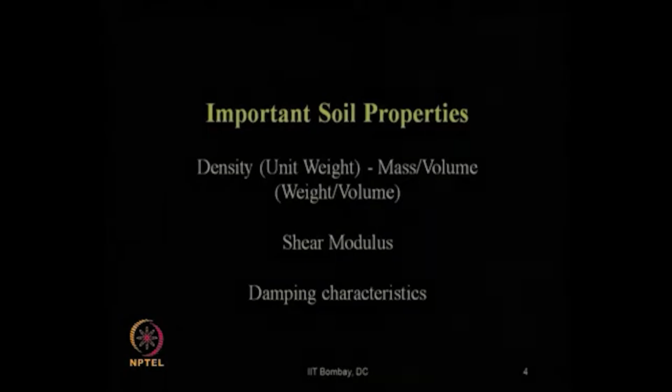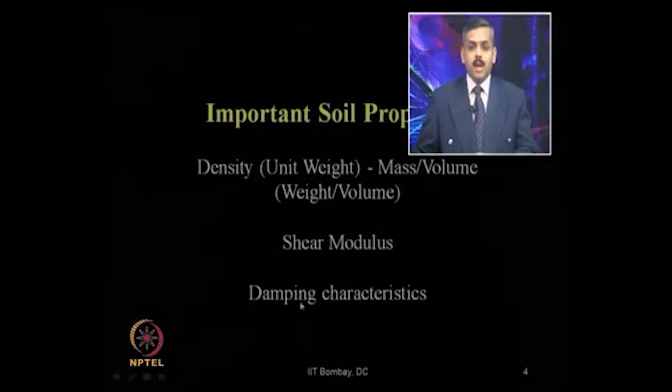In the previous lecture, we discussed the most important dynamic soil properties. We need to know first about the density or unit weight of the soil, then shear modulus, which is an important dynamic soil property, and damping characteristics, another important dynamic soil property.

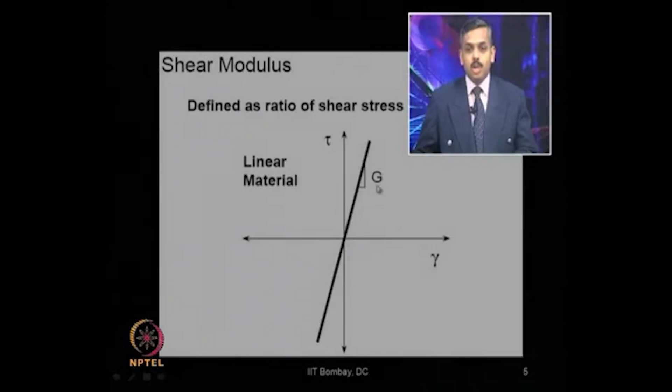For a linear material, one that behaves linearly, the tau versus gamma, or shear stress versus shear strain relationship, is something linear like this. Hence we get a single value of shear modulus from this curve.

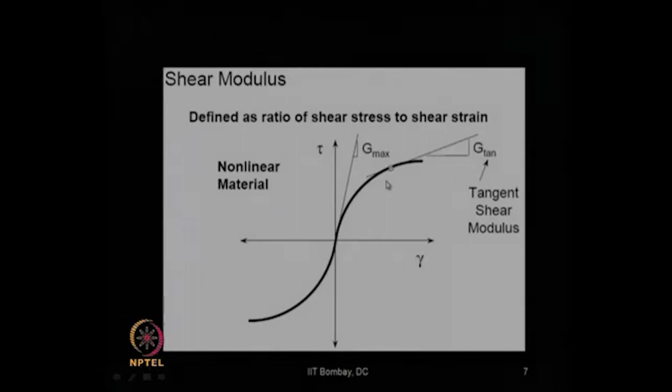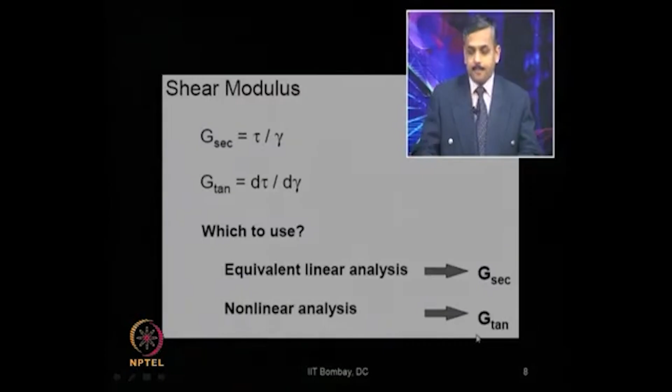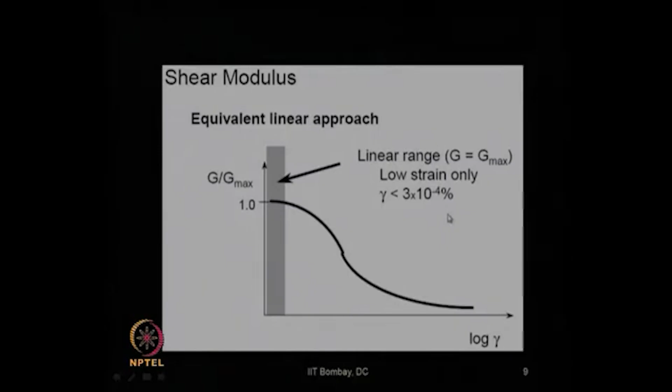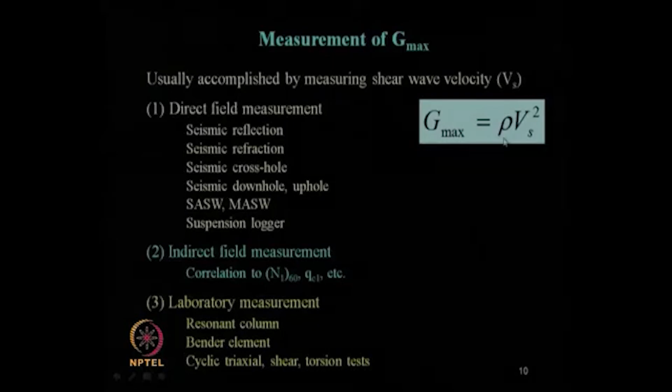Now, coming to various relationships of this G value with respect to SPT N value, that is the standard penetration test N value, several researchers have obtained correlations between the corrected SPT N value, N1 60, with respect to Gmax.

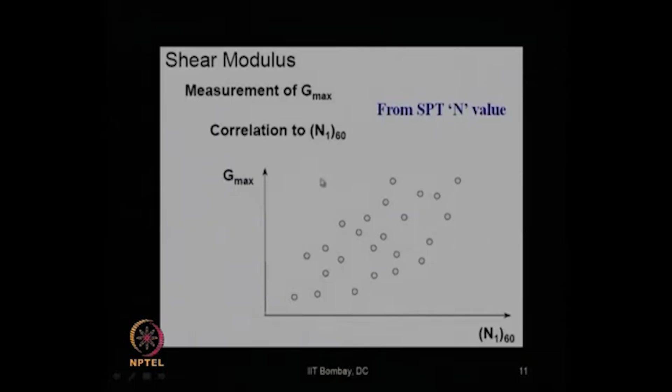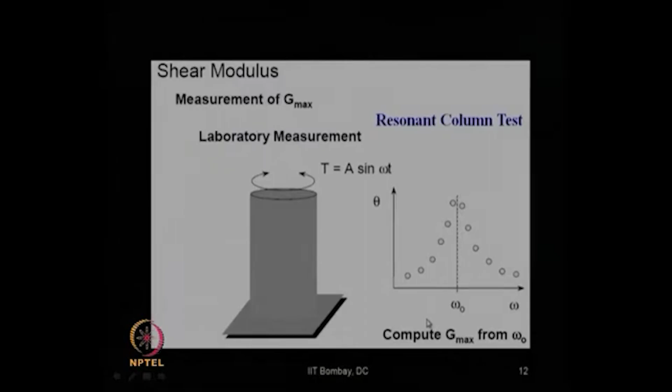Also in the laboratory, one can find out using the resonant column test the value of Gmax at the resonant frequency, from the plot of distortion at different frequencies on the resonant column under applied torque. Also, from the cyclic triaxial test, one can find out the Gmax value.

Another way to obtain the Gmax value is from in situ test parameters using various empirical relationships available worldwide, like SPT N value, CPT cone penetration value, DMT dilatometer test value, and PMT pressure meter test value. From each of these tests we get empirical relationships for different types of soil, as proposed by various researchers worldwide. But we need to remember these relationships are developed for a limited number of data points and for a typical soil of that region.

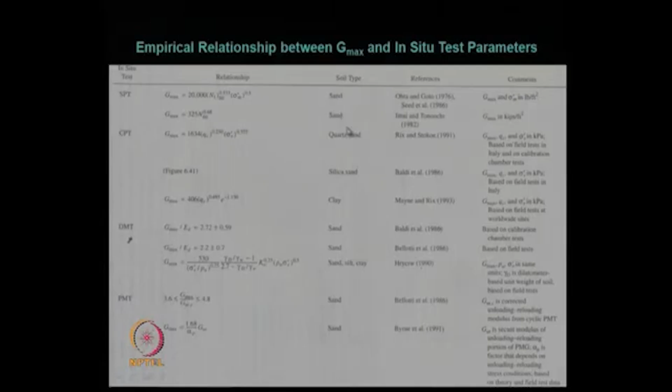So the acceptability of these empirical relationships always needs to be checked when somebody is trying to do a rigorous analysis for obtaining the Gmax value and further using that Gmax for dynamic analysis.

The variation of G by Gmax with respect to cyclic shear strain for different values of plasticity index was reported by Vucetic and Dobry in 1991, showing this type of variation, and also with respect to the number of cycles, that is, if number of cycles increases, there will be a change in the Gmax value. Obviously it is going to decrease, as can be seen from here.

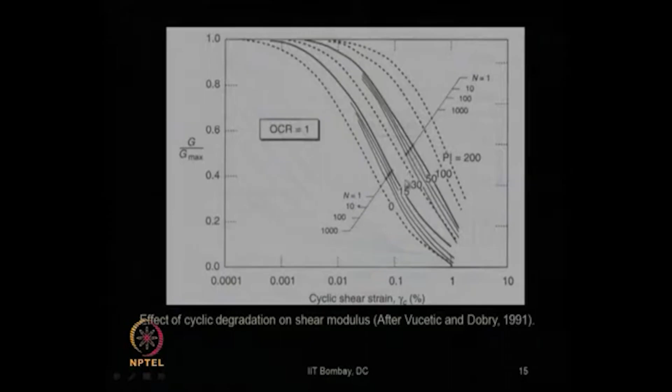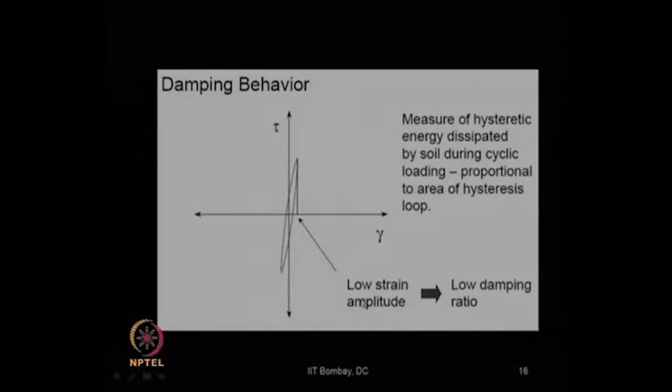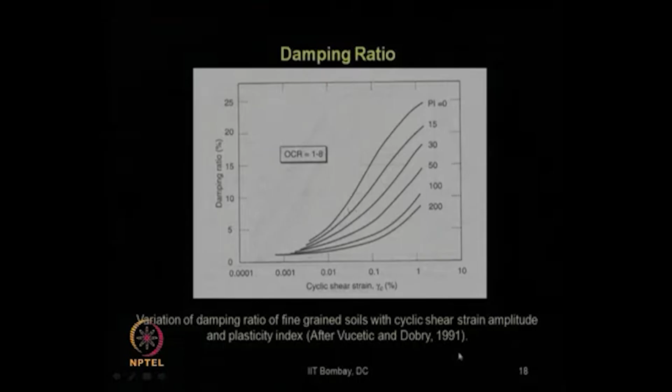The other important parameter is damping behavior, which we discussed in our previous lecture: at low strain we expect low damping ratio, whereas at high strain we get a high damping ratio value. The variation of damping ratio with respect to cyclic shear strain for a typical soil material will look like this. This result is also given by Vucetic and Dobry in 1991 for different values of plasticity index for fine grained soils.

Now, worldwide there are developments on the SPT N value versus shear wave velocity relationship, because many times people cannot obtain the dynamic shear wave velocity at the soil site or field. So instead, people can reasonably use the static test, the standard penetration test SPT N value, to get the value of Vs, which can further be used to compute the Gmax value for dynamic design.

How is it done? The example we discussed in our previous lecture was for soil of the Bangalore region in India. Sitharam et al. in 2006 proposed an empirical relationship for Vs in terms of the corrected SPT N160 value, also corrected with respect to clean sand, N160CS, to obtain the Vs value in the absence of actual field test data. Also for other types of residual soil, silty sand and sandy silt, upper bound and lower bound equations were proposed by these researchers.

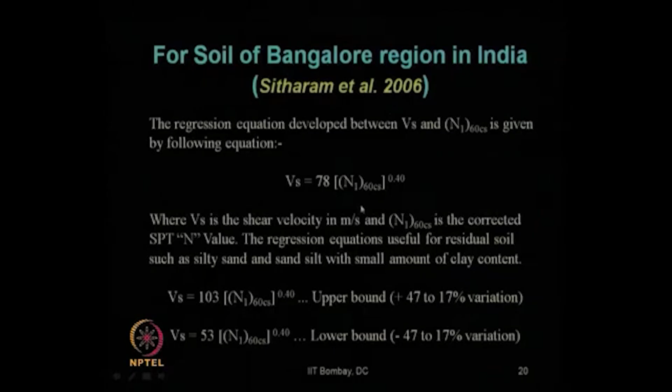Another group of researchers proposed relationships for soil of the Chennai region in India. Boominathan et al. in 2006 developed, for clay soil and for sandy soil, the relationship between Vs and the corrected SPT N value.

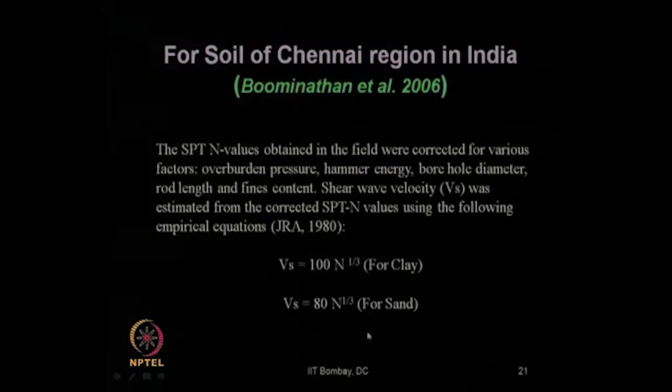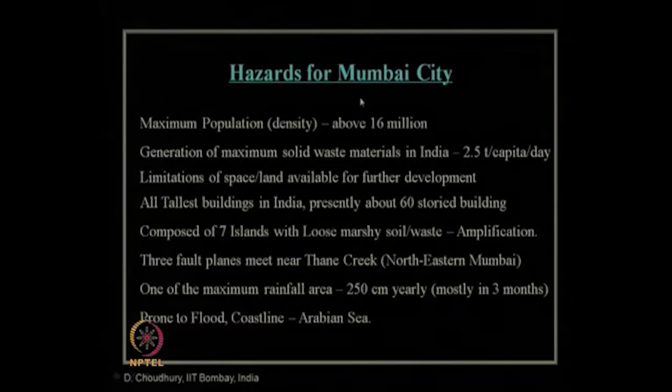Then the application of research for dynamic soil characterization of Mumbai city, which we started in our previous lecture, the reference being Sumedh Y. Mhaske's PhD thesis, Dr. Sumedh Mhaske, who completed his PhD in 2011 at IIT Bombay under my supervision. We first discussed the various hazards for Mumbai city, showing the need for a study of geotechnical earthquake engineering for Mumbai city.

This is the seismic zonation map of India as per IS 1893 Part 1 of the 2002 version, which places Mumbai city in zone 3. These are the seven original islands of Mumbai city, which have been combined together by landfilling etc. over time.

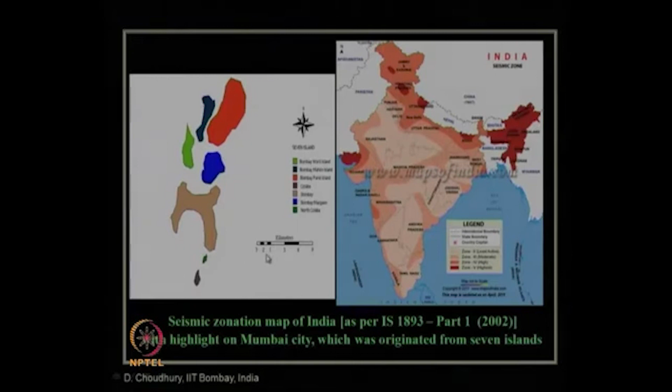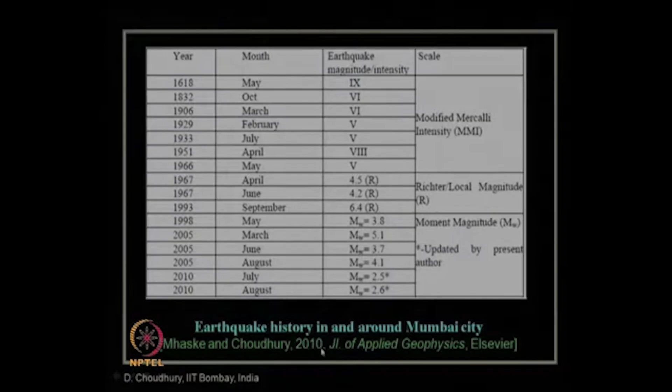These are various earthquake histories in and around Mumbai city, reported in this journal paper by Mhaske and Choudhury, 2010, Journal of Applied Geophysics, Elsevier.

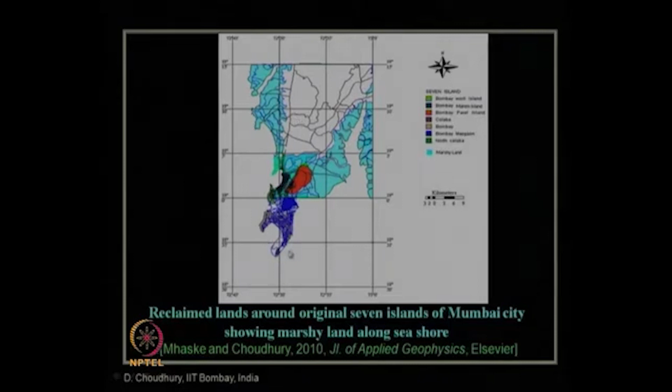This GIS based map shows the original seven islands of Mumbai and the surrounding marshy land, that is reclaimed land around Mumbai city, which actually formed today's Mumbai city.

Some other necessary information to study the Mumbai city area for seismic hazard analysis: first, the location of Mumbai city is in seismic zone 3 as per IS 1893 2002 version Part 1, so an earthquake of 6 to 6.5 intensity or magnitude is possible. Past disastrous earthquakes occurred in peninsular India, not exactly in Mumbai, but Mumbai is also a part of that region. The Mumbai city population is more than 15 million as per the 2011 census.

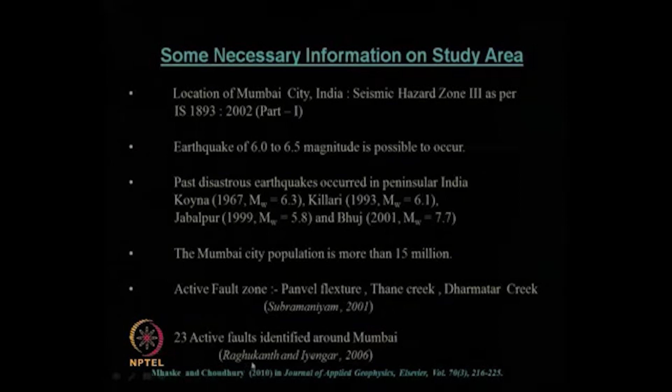Active fault zones are present close to Mumbai, like Panvel Flexure, Thane Creek and Dharmatar Creek, as mentioned by these researchers. Also, there are 23 small active faults in and around Mumbai city, as mentioned by Raghukanth and Iyengar in 2006. With these details, we completed our previous lecture.

So let us see how to take it forward in our present lecture. Now, when we want to do any dynamic soil properties study for the Mumbai city, first we should know the typical soil property of Mumbai.

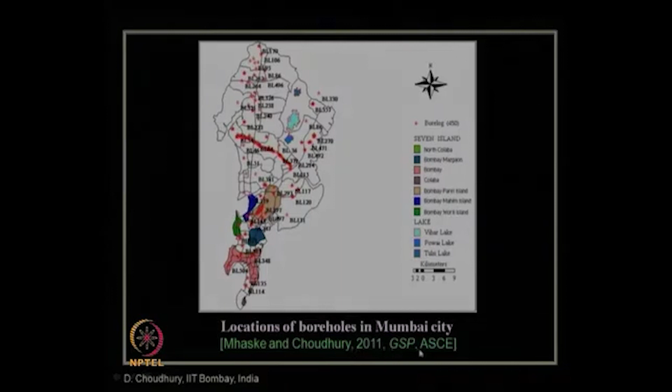To find out the typical soil property, you can see in this slide that for the entire Mumbai region, various numbers of borehole data have been collected from reliable government and private agencies, so that we get the soil profile of the entire Mumbai city. This GIS based map shows the locations of boreholes collected all around Mumbai city, available in the paper of Mhaske and Choudhury 2011, Geotechnical Special Publication of ASCE.

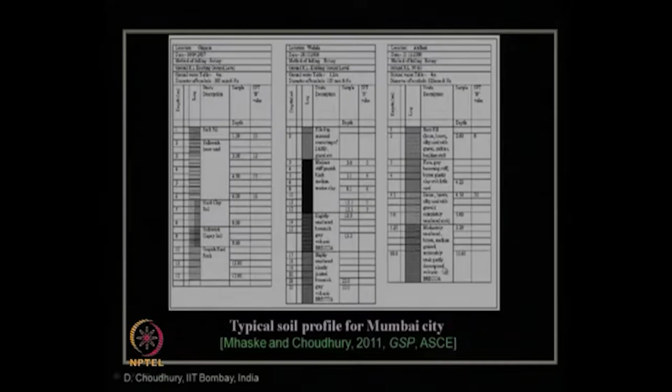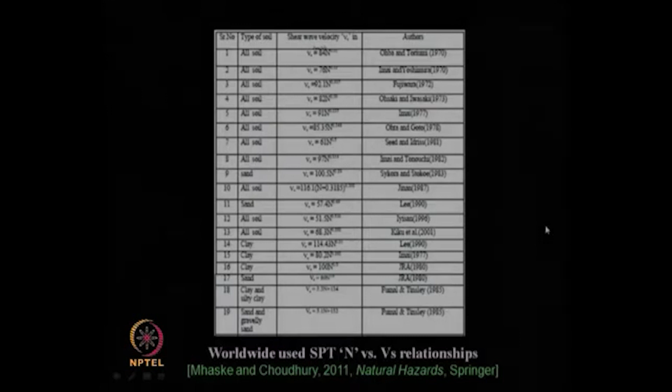We should remember that these empirical relationships were developed based on soils collected from a particular region, and based on a certain number of data set points. So application of these equations for any particular region requires care - one must check whether that type of soil exists in the same area, or whether the soil behavior at the location is similar. If not, then this relationship should not be used, and a new relationship is required to be developed for that particular area.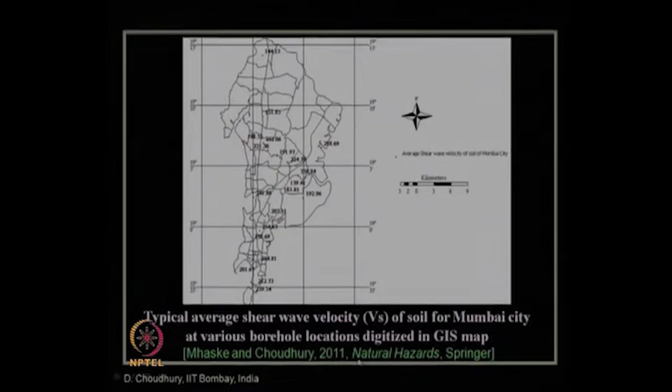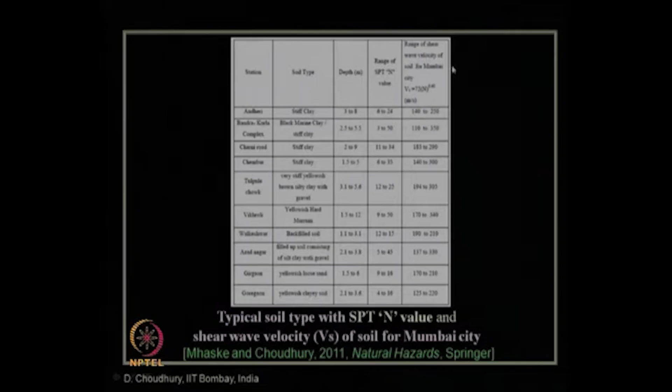Now let us look at developing a particular relationship of SPT N value versus shear wave velocity Vs for the Mumbai region from the collected borehole data. These are the typical average shear wave velocity values all around Mumbai city at various borehole locations, digitized in the GIS map, with details available in this paper. Also, these stations, soil type, depth, and SPT N value are shown here, and this is the equation developed for Mumbai city by Mhaske for his PhD work under my supervision, along with the ranges of SPT N values and corresponding shear wave velocity values at different locations in and around Mumbai.

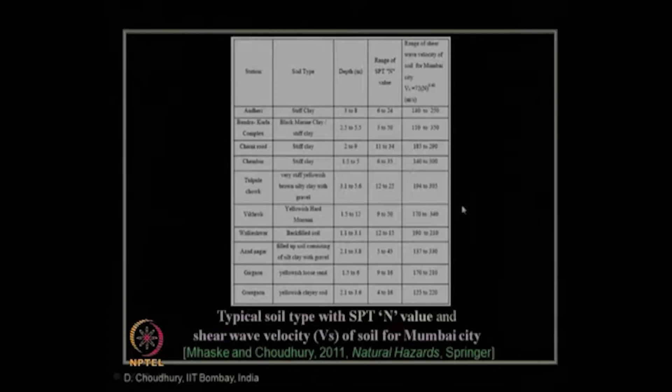One can easily see it is not in a similar range in all the places - it varies from location to location. So one needs to be very careful when planning to do any earthquake engineering study, analysis, or design at different locations of Mumbai, incorporating these dynamic soil properties.

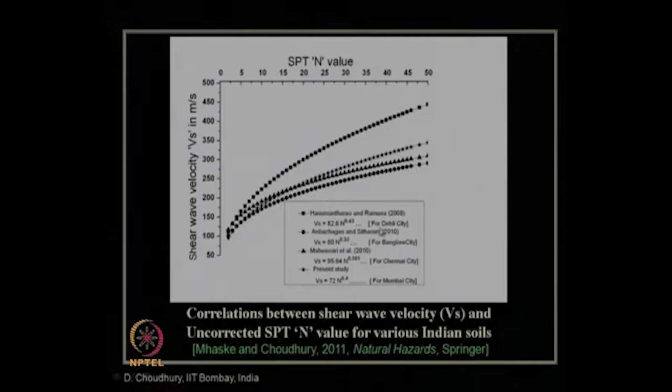This GIS based map shows the thematic map of average soil shear wave velocity greater than 100 meters per second for Mumbai city. All these red color patches represent regions where the average shear wave velocity to a particular depth is greater than 100 meters per second, meaning these are relatively stiffer soils compared to other regions.

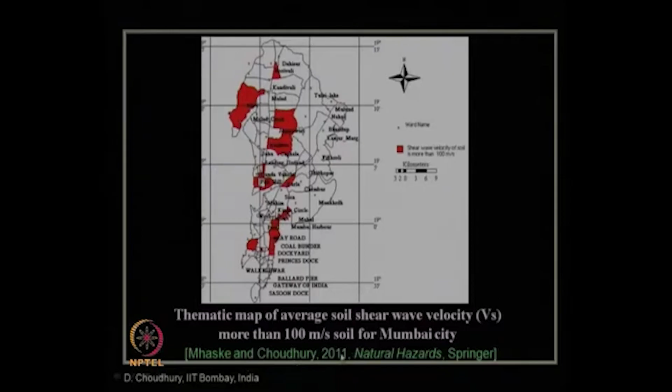This is from Mhaske and Choudhury 2011, published in the Natural Hazards journal by Springer, with all these details. This GIS map shows the geospatial contour map of average soil shear wave velocity Vs with an interval of 50 meters per second for typical soil of Mumbai city.

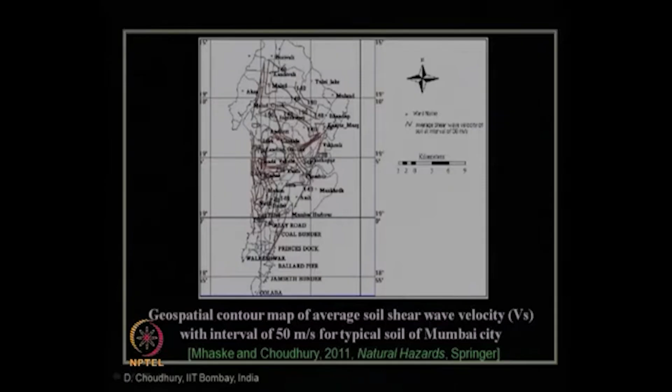So, with 50 meter per second interval, the shear wave velocity values are plotted and shown over here, like 140, 190, 290, 240, etc.

This is useful because if somebody is planning to do any construction at a region, say at Malad, they will know that at this location, typically, remember this is a typical representation and it may vary within that location also, but typically the range of shear wave velocity will be within the value mapped over here. These details are very useful for practicing and design engineers to carry out earthquake resistant design.

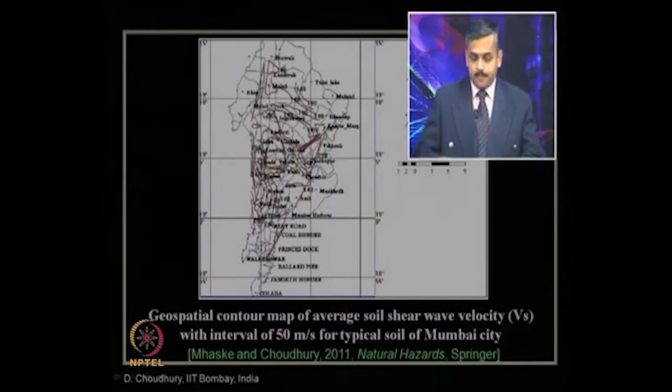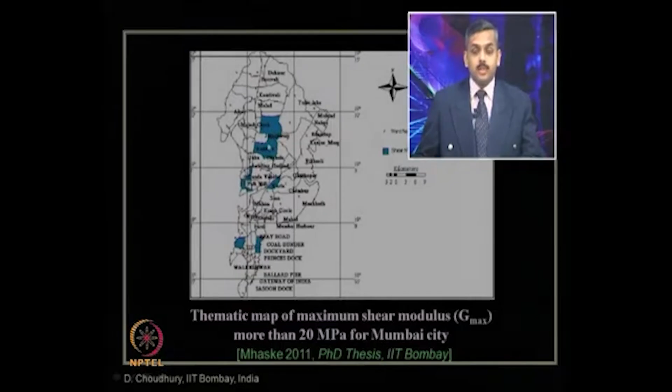What is 30? It indicates the average shear wave velocity up to a 30 meter depth from the ground surface. That is why this number 30 came here.

So, Vs30 of the soil, in units of meter per second, is used to classify the soil into different classes. This soil site classification is based on the NEHRP standard of 2000, which is a codal guideline or provision as mentioned in USA and practiced worldwide.

For soft soil, Vs30 value will be less than or equal to 180 meter per second. For stiff soil, it is between 180 to 360 meter per second. For very dense soil, it is between 360 to 760 meter per second, and so on.

Now, for Mumbai soil, a study carried out by Dr. Mhaske for his PhD thesis at IIT Bombay found that most of the soil of the Mumbai region comes under soil class D or E, that is, stiff soil and soft soil, because their Vs30 value was found to be within the range of 100 to 360 meter per second, as mentioned over here.

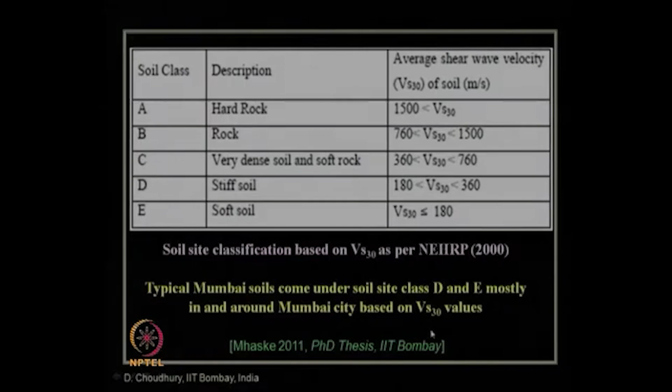Now, coming to another important subtopic, that is soil liquefaction. First, I will mention that for detailed basic understanding of soil liquefaction, one should refer to my other video course on soil dynamics, developed for this NPTEL course, where module number 4 also discusses soil liquefaction.

What is soil liquefaction? As mentioned in the book by Kramer in 1996, it is the transformation from a solid state to a liquefied state as a consequence of increased pore pressure and reduced effective stress for soil. And as mentioned by Osinov in 2003, if the shear resistance of the soil becomes less than the static driving shear stress, the soil can undergo large deformations and is said to liquefy.

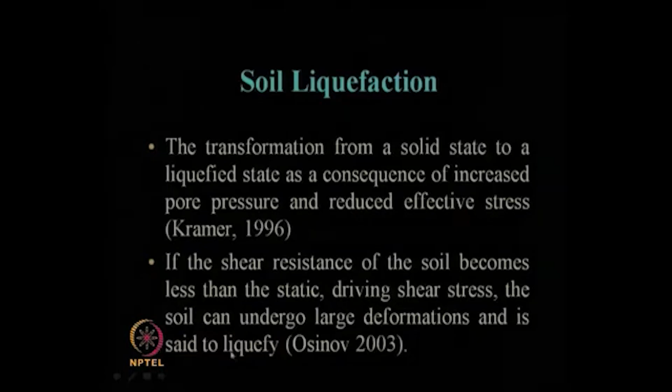So, soil liquefaction can occur due to several dynamic loads, but earthquake is of course one of the reasons. So, due to earthquake also, soil liquefaction can occur.

Now, soil liquefaction due to earthquake: modern liquefaction engineering developed after the Niigata 1964 earthquake and the Great Alaskan earthquake of 1964. After that, research extensively started in this area of soil liquefaction.

So, key elements of soil liquefaction as proposed by Seed et al. in 2003 are mentioned over here, and we should always remember that every new earthquake creates a new research area, because we get lots of more data and understanding about how the soil behaved during and after the earthquake.

So, all this information, whether the soil got liquefied, what type of soil was there, if it has not liquefied during an earthquake of a given magnitude, why it has not liquefied, what are the characteristics of the soil, is used to try to correlate various physical and engineering soil parameters with respect to liquefaction estimation, and so on.

This assessment of likelihood of triggering or initiation of soil liquefaction needs to be carried out. Then assessment of post liquefaction strength needs to be studied, because after liquefaction, how much strength of the soil remains and whether it can be further used for construction of structure or not. These are important to know.

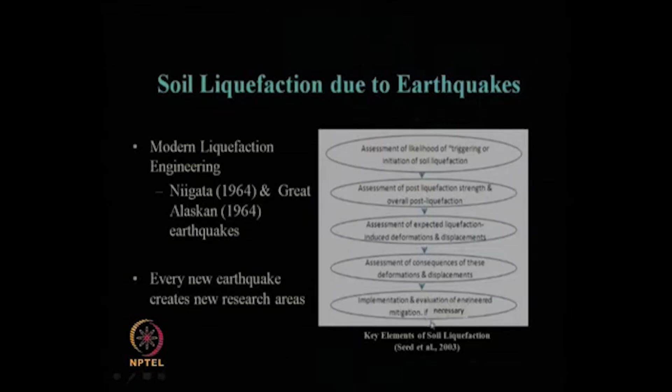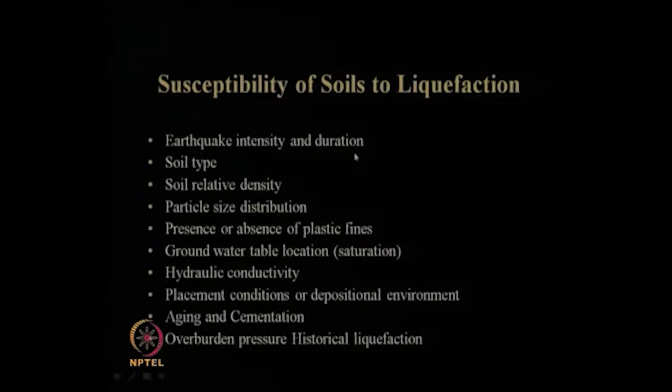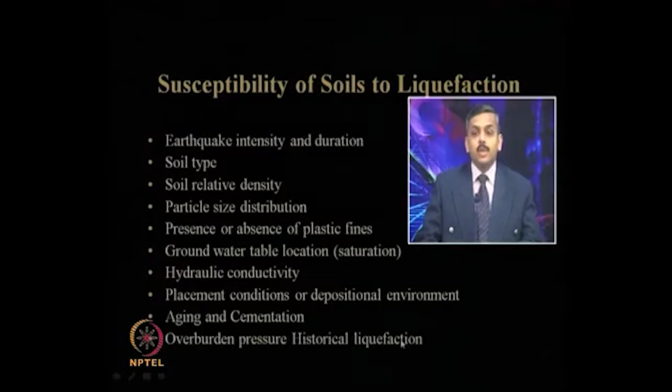Now, susceptibility of soil to earthquake induced liquefaction depends on several parameters: earthquake intensity and duration, type of soil present, soil relative density, particle size distribution, presence or absence of plastic fines, groundwater table location, degree of saturation, hydraulic conductivity or permeability of the soil, placement conditions or depositional environment, aging and cementation of the soil structure, overburden pressure, and finally historical liquefaction. So, all these factors influence earthquake induced soil liquefaction.

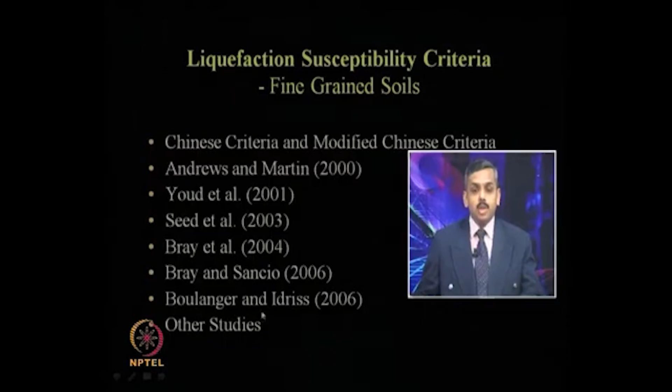Now, liquefaction susceptibility criteria: there are several methods, as can be seen here, for fine grained soils as well as coarse grained soils. These include Chinese criteria and modified Chinese criteria, Andrews and Martin criteria of 2000, Youd et al. 2001 criteria, Seed et al. 2003 criteria, Bray et al. 2004 criteria, Bray and Sancio 2006 criteria, Boulanger and Idriss 2006 criteria, and various other studies.

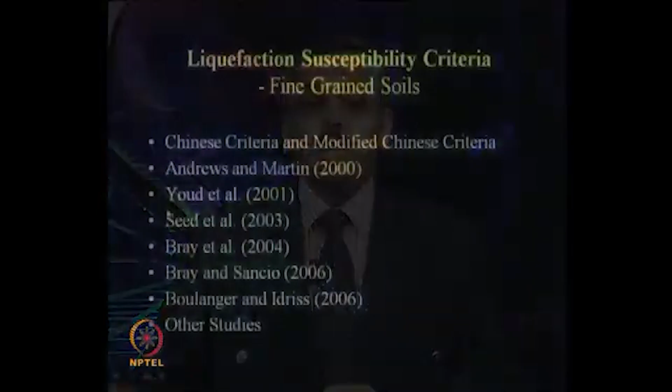Among these, the most important or most widely used one is this one, by Youd et al. 2001. This is the most used worldwide for liquefaction susceptibility estimation.

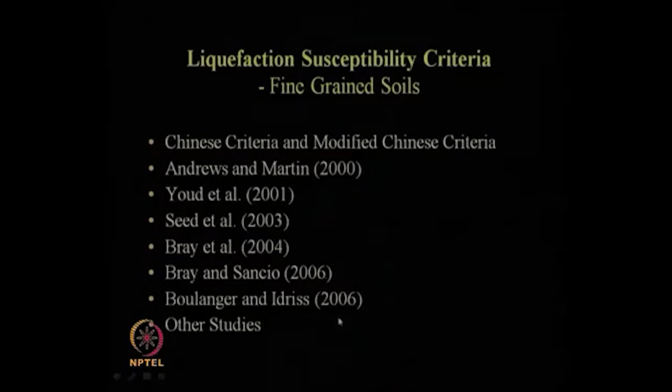Coming to Chinese criteria and modified Chinese criteria: the Chinese criteria was developed by Wang in 1979, based on the study on Haichen and Tangshan in 1975 and 1976.

The criteria says that the percent finer than 0.005 mm should be less than 15%, liquid limit should be less than or equal to 35%, and water content should be greater than 0.9 times the liquid limit for that fine grained soil. This criteria is basically for fine grained soil.

This is the typical plasticity chart, as we know, liquid limit versus water content, and this is the A-line equation. The modified Chinese criteria says that fine soils that plot above the A-line, as shown in the figure, are considered susceptible to liquefaction if these three conditions are met: percent clay present in the soil is less than 15%, liquid limit is less than or equal to 35%, and in-situ water content is greater than or equal to 0.9 times the liquid limit.

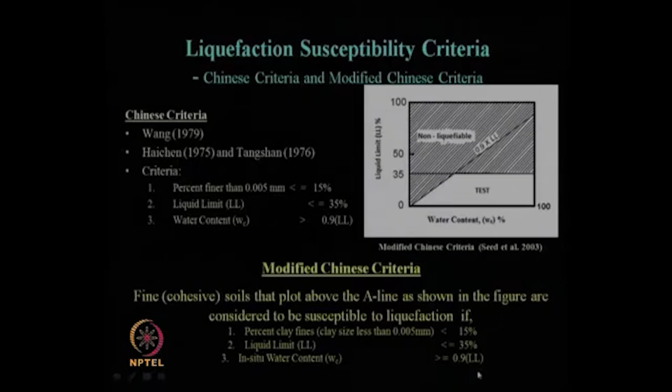Then the Youd et al. 2001 criteria is a combination of several other researchers' findings, and this is a kind of report or methodology proposed which is accepted worldwide so far.

Seed et al. in 1985 developed the CRR versus CSR curve for granular soil. CRR is cyclic resistance ratio and CSR is cyclic stress ratio. The details about these I have already discussed in my other video course for NPTEL, on soil dynamics. So I request all viewers of this course to also go through my other video course on soil dynamics, module number 4 of that course, so we can get all these basic details; I am not covering it here.

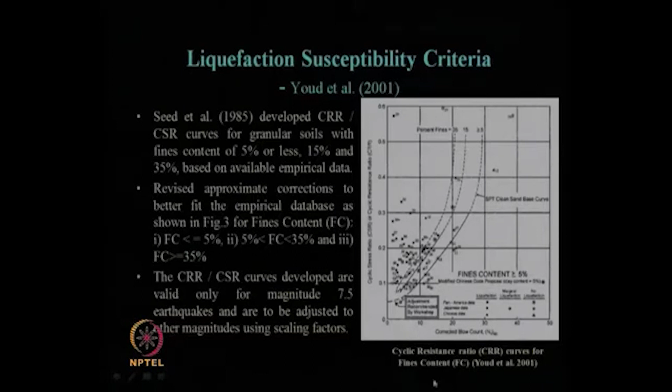It has been proposed how to estimate this cyclic resistance ratio, or CRR, from corrected blow count SPT N1-60. These are all the collected historical data points from actual field test results, showing where the soil got liquefied and where it did not. This shows three curves for percent fines: less than or equal to 5%, between 5 to 15%, between 15 to 35%, and more than 35%. If the percent fines is less than or equal to 5%, it is called the SPT clean sand based curve, and clean sand correction is also required to estimate the CRR value from this curve.

Seed et al. in 2003 proposed recommendations for fine grained soil, plotting plasticity index versus water content to liquid limit ratio on the x-axis. They divided this into three zones: susceptible to liquefaction, moderately susceptible, and non-susceptible. Accordingly, if somebody wants to plot their soil in this region and find out whether it falls in the susceptible or non-susceptible range, this recommendation may be used.

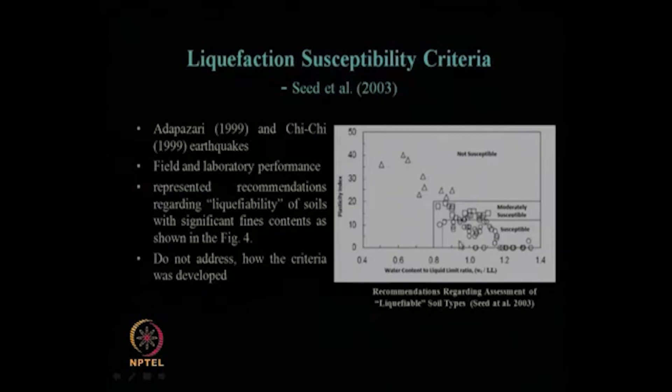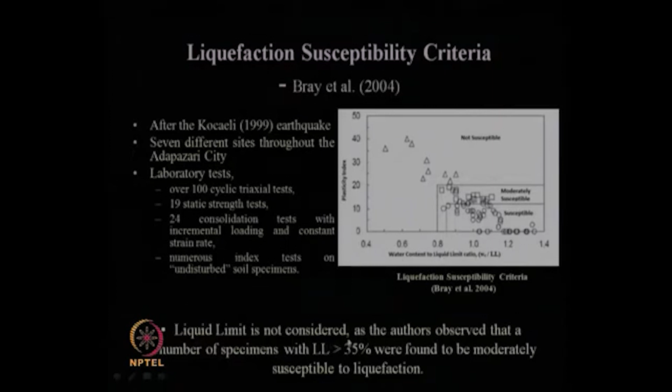Bray et al. in 2004 proposed another methodology using the similar concept of plasticity index versus water content to liquid limit ratio, and mentioned that liquid limit is not considered, as the authors observed that a number of specimens with liquid limit greater than 35% were found to be moderately susceptible to liquefaction.

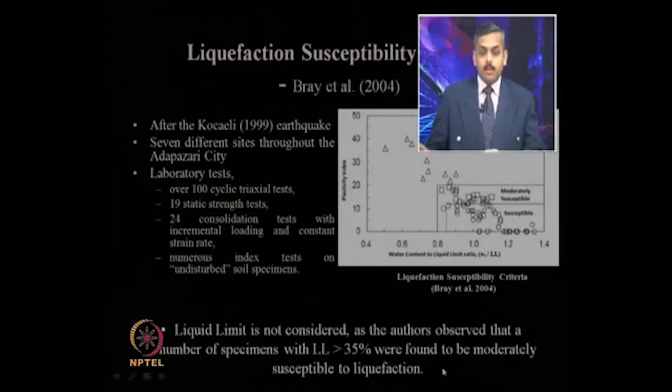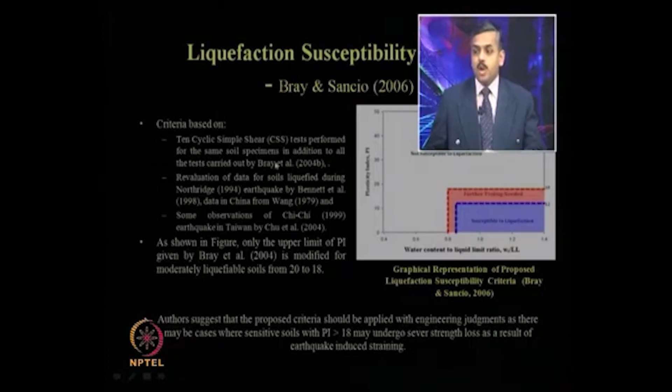Another set of researchers like Bray and Sancio in 2006 proposed a criteria based on 10 numbers of cyclic simple shear tests performed for the same soil specimen, in addition to the tests carried out as explained in the previous slide.

Some observations of the Chichi earthquake of 1999 as reported by Chu et al. in 2004 are also incorporated, and in the same pattern of plasticity index versus water content to liquid limit ratio, the results have been zonified into three zones: susceptible to liquefaction, further testing needed, and not susceptible to liquefaction.

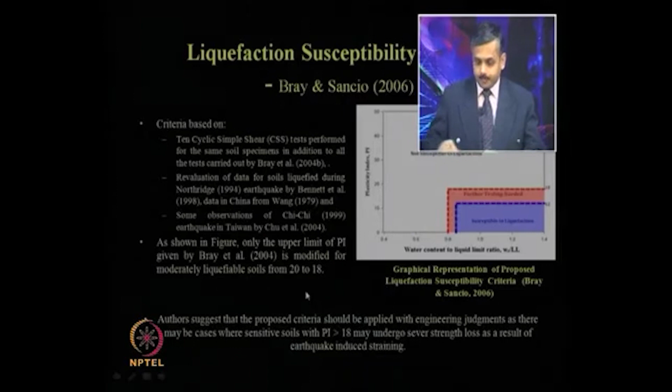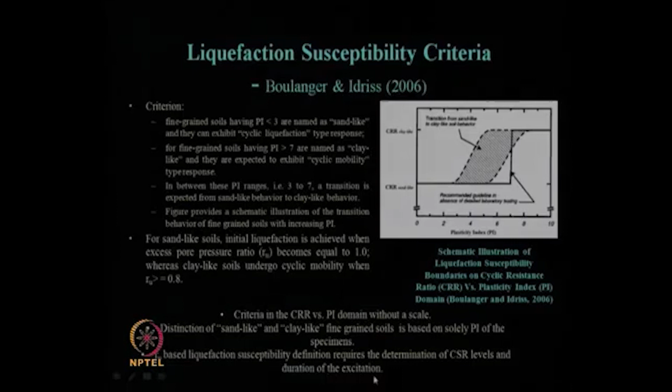This RU based liquefaction susceptibility definition requires the determination of CSR levels and the duration of excitation. These things are topics of research even today in 2013. Researchers are carrying out various studies from collected field test data of liquefied zones, non-liquefied zones, transition zones, etc., combining this with laboratory test data sets, so that the interpretation of results and proposed new criteria will be valid and usable by various researchers.

Now coming to the seismic liquefaction hazard map of Mumbai city using GIS and GPS. The details of this work can be obtained in the journal paper by Mhaske and Choudhury, 2010, in the Journal of Applied Geophysics, Elsevier publication, volume 70, number 3, pages 216-225.

The evaluation of soil liquefaction was carried out from the entire set of borehole data collected for the Mumbai region, where the dynamic soil properties, the VS value, has been estimated and reported, as discussed a few slides back.

For each borehole location, the soil liquefaction susceptibility is estimated using the simplified procedure for evaluation of liquefaction potential. This simplified procedure was basically proposed by Seed and Idriss in 1971, further modified by Youd and Idriss in 1997, and finalized by Youd et al.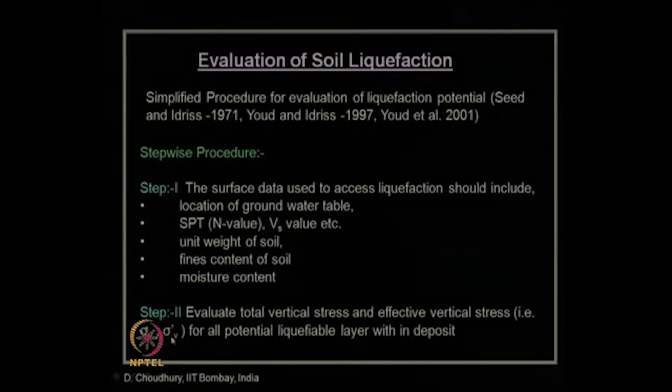In step 2, evaluate the total vertical stress and effective vertical stress, that is sigma V and sigma V dash, for all potentially liquefiable layers within the deposit, and then calculate the cyclic stress ratio or CSR as induced by the design earthquake.

For a particular region, we know the design basis earthquake as per the codal provisions or the zonation map or the seismic microzonation point of view. One can find out the value of Amax for a region, and that Amax value can be used.

G is acceleration due to gravity, so this is just a number. RD is nothing but the stress reduction factor due to flexibility of the soil, and sigma V is total vertical stress while sigma V dash is effective vertical stress. With that, a non-dimensional parameter CSR, cyclic stress ratio, can be obtained, which was proposed by Seed and Idriss in 1971.

Now, how to select this stress reduction coefficient RD? There are various researchers who have proposed different ranges, values, or equations for RD.

We can see as we go deeper and deeper inside the ground from the ground surface where depth is 0, as the depth increases in meter units, the RD value reduces from 1 to lower values. A value of 1 means no correction or stress reduction coefficient is required in this equation, which is the case at ground surface. But as we go deeper, because of flexibility of the soil, this stress reduction coefficient needs to be incorporated.

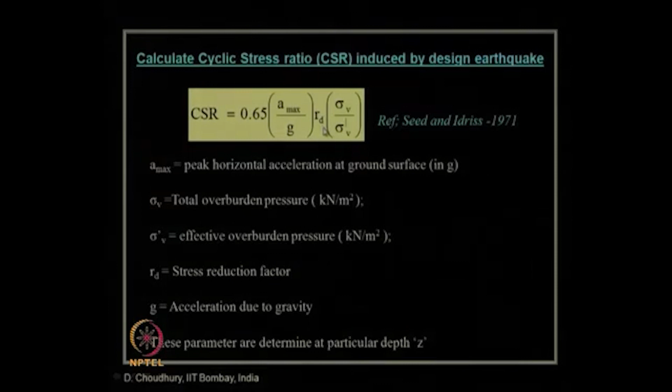One can easily see there is a wide variation in the value of RD, which can influence the calculated value of CSR. So it is a question which is the correct value to calculate RD. In absence of the correct value, one can use the method proposed by Youd et al. 2001 to calculate the reasonable range or value of RD.

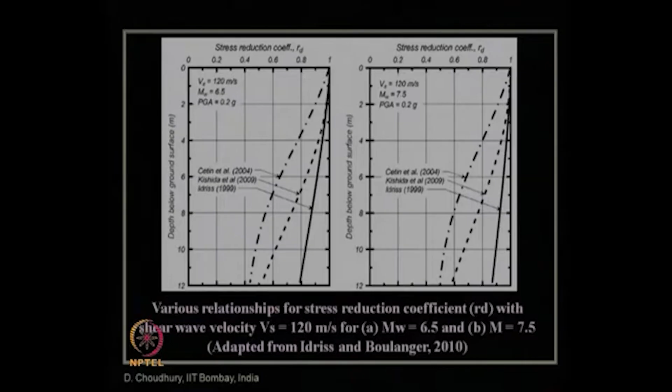Then cyclic resistance ratio, another parameter CRR, at the reference magnitude of 7.5 can be calculated using SPT data of N1,60 using this expression, known as Blake's equation as proposed by Blake, available in the paper of Youd and Idriss 1997 and also Yu et al. 2001. Here x is nothing but N1,60, the corrected SPT N value, and various coefficients a, b, c, d, e, f, g, h are all mentioned.

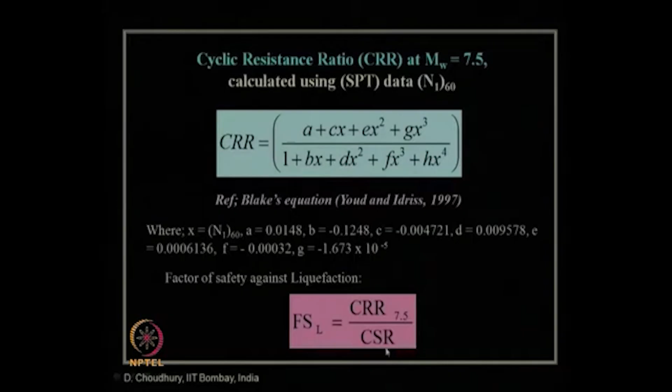Factor of safety against liquefaction is computed using this expression. Factor of safety against liquefaction is nothing but CRR at 7.5, which is at the moment magnitude of 7.5. If the earthquake of the zone for which the design is considered is different than 7.5, then corrections due to the magnitude need to be carried out. So CRR divided by CSR will give the factor of safety with respect to liquefaction.

Using this concept, this paper of Mhaske and Choudhury in the Journal of Applied Geophysics, Elsevier, classified three ranges of factor of safety with respect to liquefaction, to identify or remark soil as critically liquefiable, moderately liquefiable, or non-liquefiable soil.

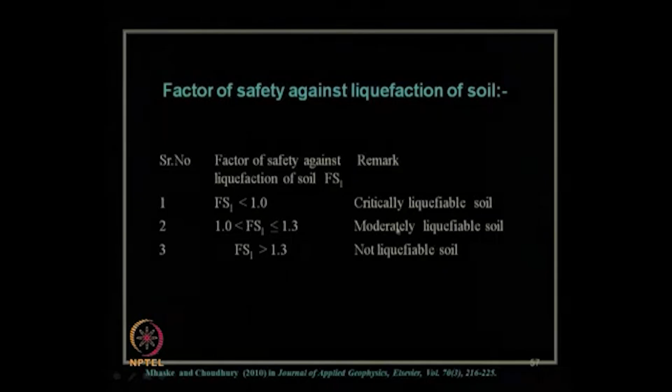What is critically liquefiable? When factor of safety is less than 1. When factor of safety is between 1 to 1.3, it is mentioned as moderately liquefiable soil, and when factor of safety is greater than 1.3, it is considered as non-liquefiable soil.

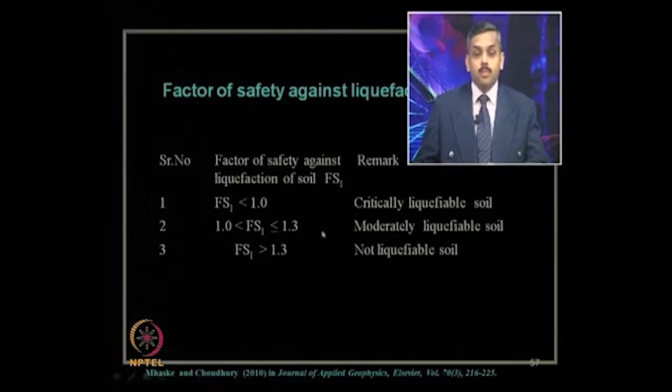So, using these ranges of factor of safety for entire Mumbai city in this paper, the calculations for factor of safety against liquefaction with respect to depth and with respect to all boreholes were carried out.

Finally, this is the GIS based map for entire Mumbai, which shows the critically liquefiable area. Critically liquefiable means in these locations, in these patches as shown by this color, that shows a critically liquefiable area in Mumbai at a moment magnitude of 6. So, that means if a moment magnitude of 6 earthquake comes in Mumbai, these are the regions where soil is going to liquefy as the present scenario is concerned. Critically liquefiable means factor of safety with respect to liquefaction will be less than 1.

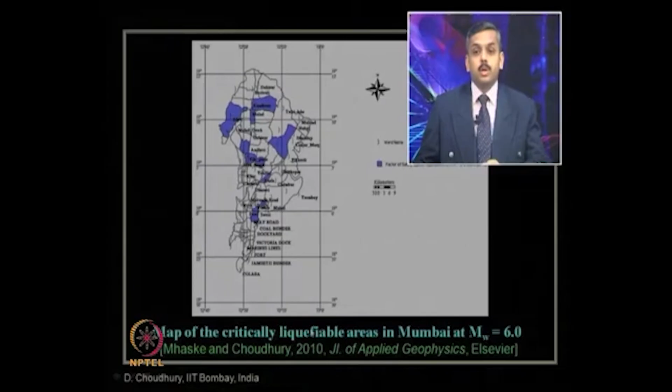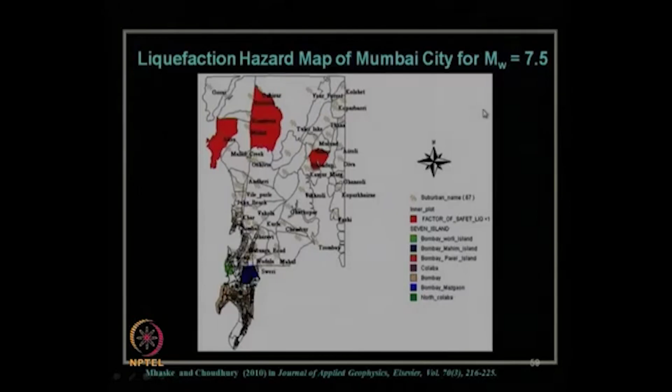So how can people use this hazard map for further design? If somebody is planning to construct any big high rise building in these locations, which is quite possible in Mumbai city, extra design care and design measures need to be taken for the foundation design and other design. Like if somebody is constructing a pile foundation in these locations, then pile foundations need to be designed with respect to the liquefiable zone, which I am going to discuss in subsequent lecture modules in this course.

This table shows the various values of factor of safety against liquefaction for entire Mumbai city as obtained in this journal paper by Mhaske and Choudhury, 2010, in Journal of Applied Geophysics, Elsevier publication. One can see these are the different site addresses like Andheri, Bhandup, Borivali, Bandra, Malad, Dahisar, etc. Factor of safety against liquefaction for different moment magnitudes are mentioned over here, like moment magnitude of 5, 5.5, 6, 6.5, 7, 7.5 - all values are given over here.

One can see the non-bold values are perfectly fine. That means, if in Mumbai magnitude 5, 5.5 earthquake comes, there is absolutely no problem in terms of liquefaction in these mentioned 10 locations, these 10 sites.

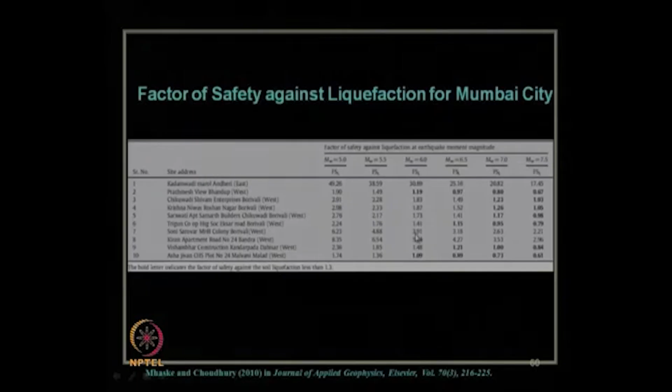But if magnitude 6, 6.5 or more comes, the soil tends to start liquefying at certain locations, like one can see at Bhandup West, if an earthquake magnitude of 7.5 comes, the soil is going to critically liquefy, that is, it is going to fully liquefy. That means the factor of safety is less than 1, even at magnitude 7 also. Similarly, for other locations also, the values are given over here, which is very much useful for any designer to utilize this concept to take protection and necessary design steps, methodology and construction steps for earthquake resistant design in and around Mumbai city using this data.

So, in concluding remarks, we can say that the typical shear wave velocity we have obtained for the soil in Mumbai region, between 3 meter to 10 meter range, varies typically between 140 to 350 meter per second, and typical areas like Kandivali, Borivali, Goregaon, Malad of Mumbai city can be prone to critically liquefiable conditions when an earthquake magnitude of 7.5 hits in and around Mumbai.

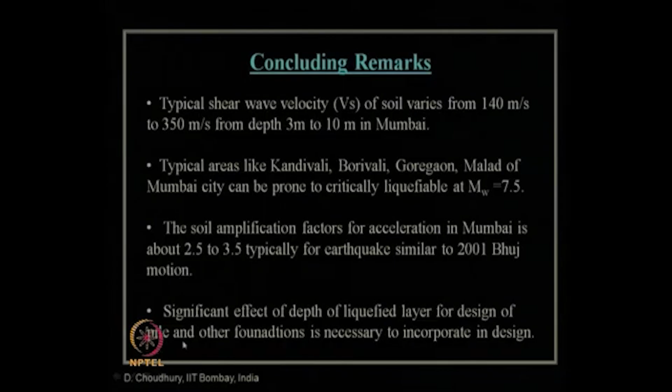The soil amplification factor for Mumbai, which has been obtained earlier, can range between 2.5 to 3.5 if a similar type of Bhuj earthquake motion of 2001 hits Mumbai city. And from this known knowledge of geotechnical earthquake engineering, one can further take precautionary measures to find out the significant effect of depth of this liquefying layer, which needs to be considered for design of pile foundations and any other type of foundation, even shallow foundations, which is necessary to incorporate in the design.

So, with this we have come to the end of the present module, module number 6. We will continue further in our next lecture.